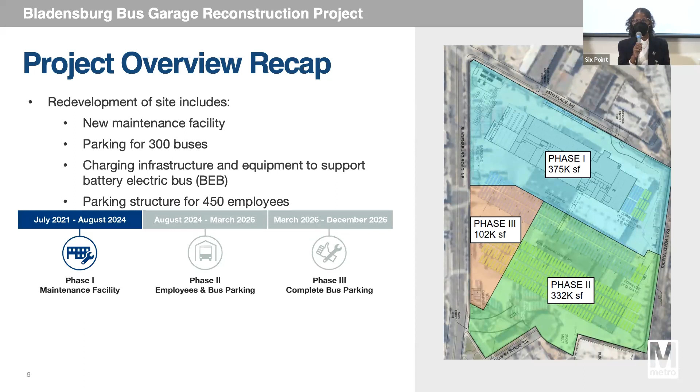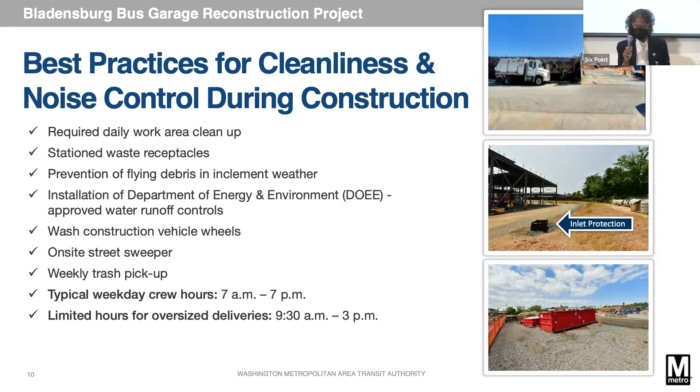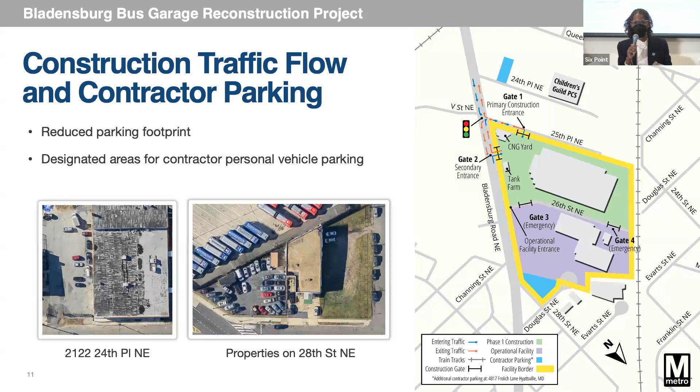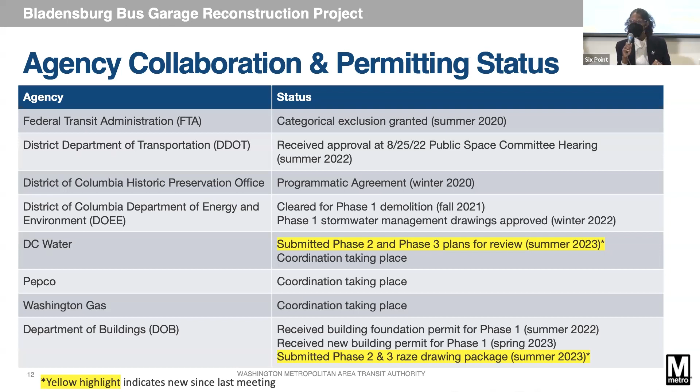I also want to point you to 2 upcoming events by Metro, one of them being Metro's Bus Maintenance Information Session, which is happening in November, and also Metro's Transit Police Prospect Day open house in December. You can visit the links to find out how to register and more details. So thank you.

Any questions in the room?

Is there any volunteer action to do anything for the community in those areas? When you say volunteer action, are you speaking to opportunities for the community to volunteer, or? The community volunteering to clean up or wash the inside of the buses. Right, so during the construction, the buses wouldn't be on site.

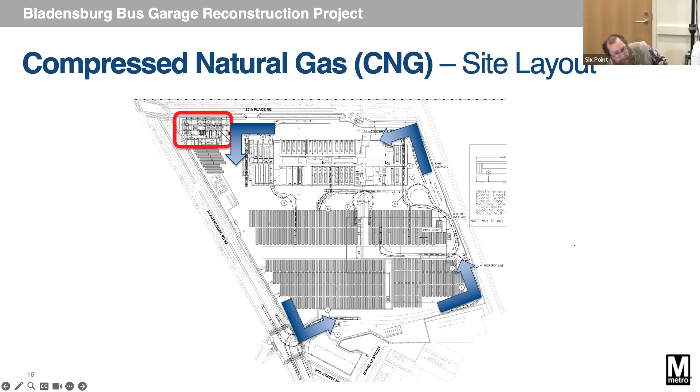Another consideration for where we located it was to reduce the length of underground piping. You can see on the right there's the fuel building, that's the fuel canopy, that's where the buses fuel with the CNG. And right over to the left is actually where the CNG yard is. So again, we wanted to reduce the length of the pipe underground. If you imagine putting this in the center of the site, you're just increasing the pipe length.

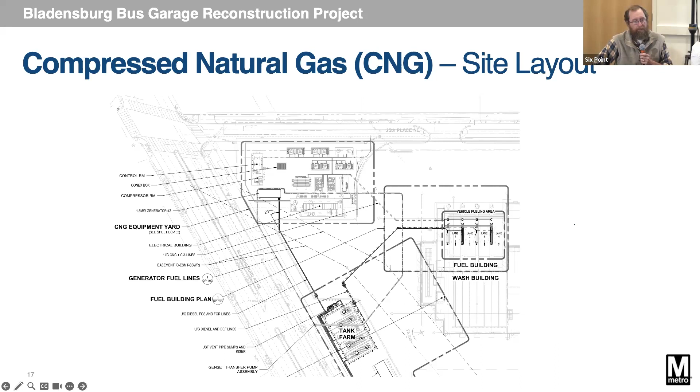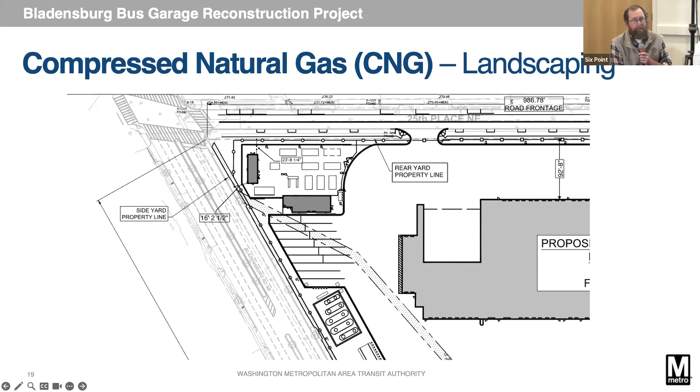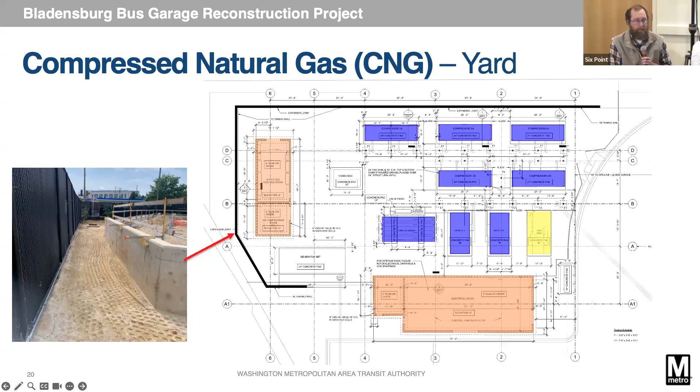So the top of that is what the finished grade will be. From that up to the top of the retaining wall in that corner, there is about 3.5 feet.

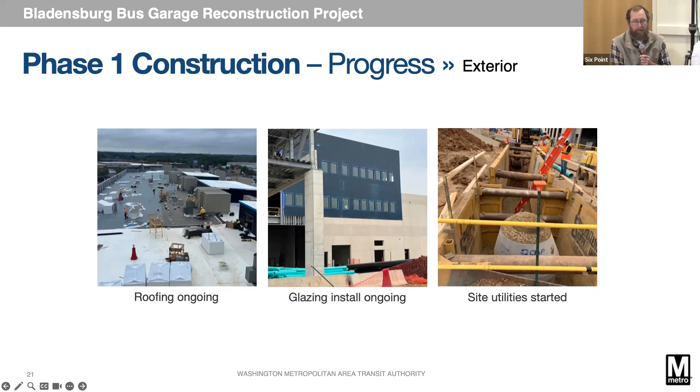Moving on, just some site updates and progress updates. Here's a lot of the exterior. So the roof, we actually finished the roof at this point, so you can kind of see that white, that's the finished roof layer. We installed a lot of the glazing, most of it at this point is installed and has been tested. And then we also started the site utilities.

This is a pretty cool shot. There's a pedestrian bridge that goes from the maintenance building over top of the roadway for the buses that ties into the parking garage. This is the first half of that bridge, the second half will be set in phase 2. You can kind of see it from both sides. Our building is really long, so some of these pictures, it's hard to actually show the perspective of how long it is.

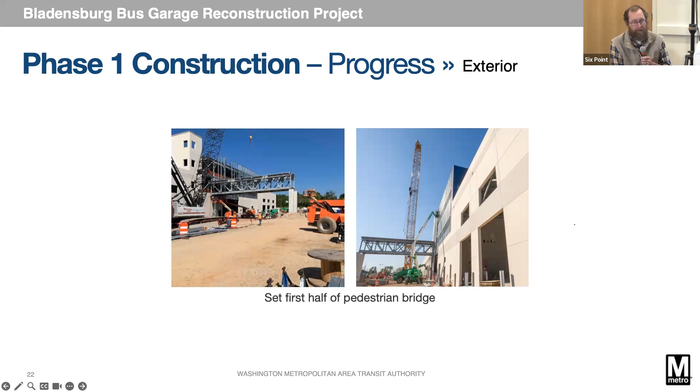Here's just another picture, trying to show work progressing and how long the building is, and where we're at in construction. All the precast is done, the windows are up, and we've actually started overhead doors.

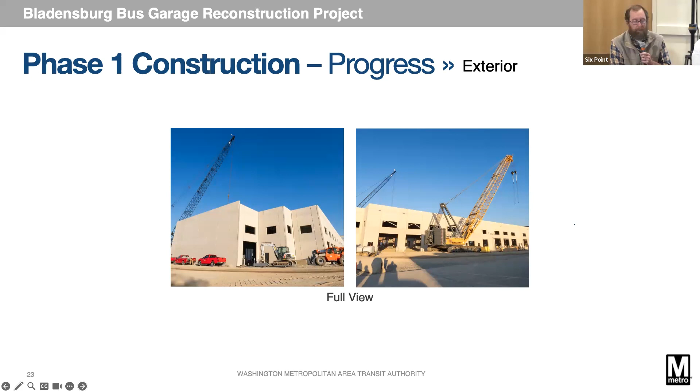How accurate and safe is it? So I believe the overhead doors are 14 feet wide, which is the same as the stalls, and it's the same as the doors that they have there now. So it should be fairly safe.

I can't speak for WMATA's operations, but I'm assuming they might have some protocol, but again, I can't speak for WMATA.

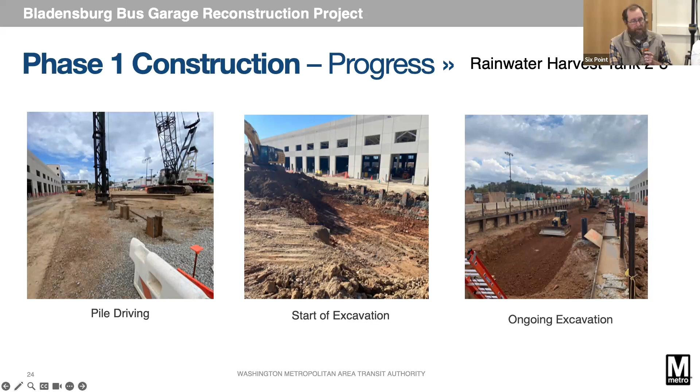We finished driving all the piles and we've started making our first initial cut and into our second cut. You kind of see the progression from left to right there.

We also started the CSX wall. We have a small retaining wall on the north side of the site. Right on the other side of that fence is the CSX lines. These piles you see were actually drilled due for safety for the tracks and everything. We had a lot of coordination with CSX, and we came to the resolution that drilling these piles and setting them in concrete was best for us and them. So you can see the progress, this wall is actually done. We just have to clean up the bench that you see those pieces of equipment on.

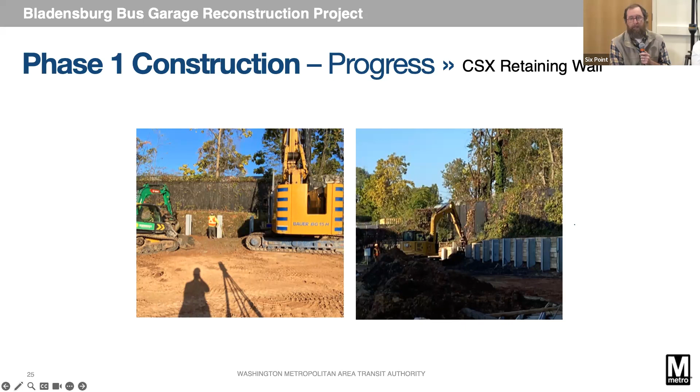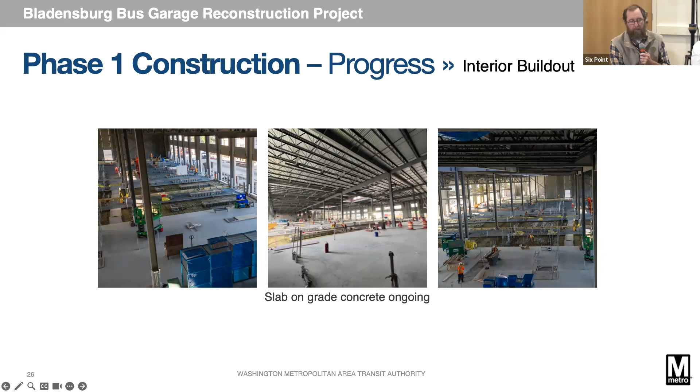Here's the interior, you can see the roof is on. We really wanted to highlight how much slab on grade work has been completed. As of last week, we have finished all of the interior slab on grade, that's basically the concrete down on the floor there. You can see a couple different angles and viewpoints.

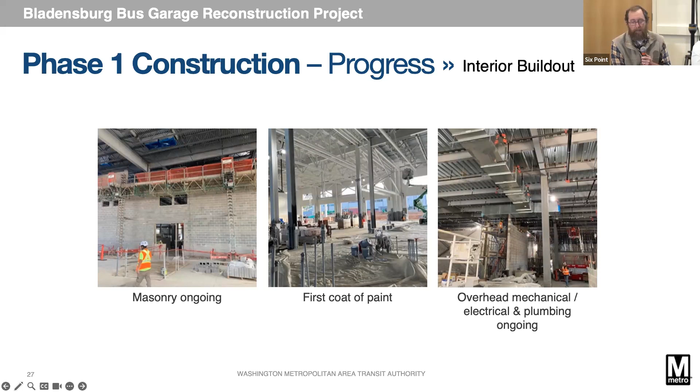Continuing on with the interior, the mason has finished up most of their tall walls. We've started painting the first coat of paint on the interior, and a lot of our overhead mechanical, electrical, plumbing, and fire protection has started to go in as well.

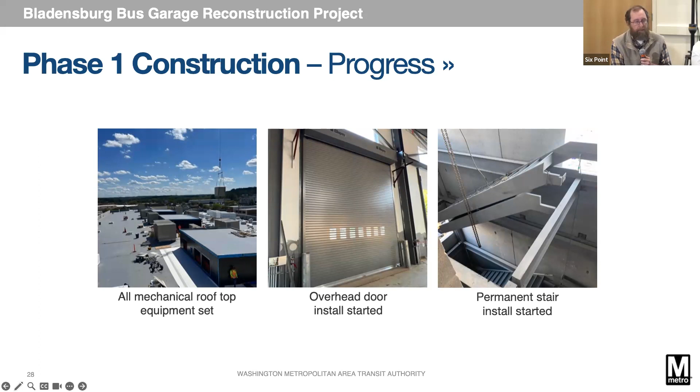Some last shots here. We did set all of the rooftop equipment. Our overhead doors have started, and we've actually started all of the interior permanent stairs. I think with that, I'll turn it over to Donzel for questions.

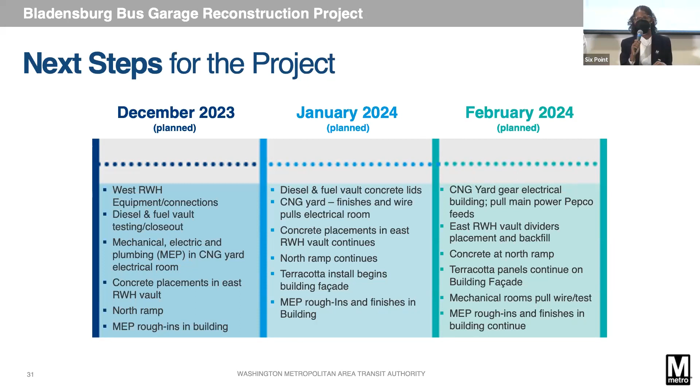Thank you, Donzel. So looking ahead to the next quarter - next slide, please. In December, we'll be working on items including the equipment and connections for the West Rainwater Harvesting Vault, also mechanical, electrical, and plumbing items for the CNG yard and building, diesel and fuel vault testing, as well as north ramp work.

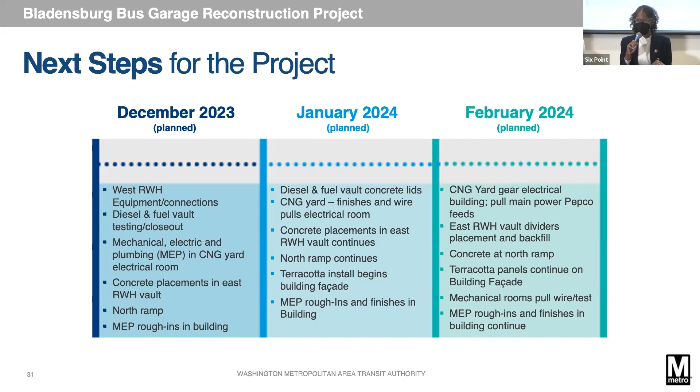In the new year, we will work on including installing terracotta on the building's facade, the East Rainwater Harvesting Vault, as well as continuing north ramp work. And in February, we will work on items including power feeds for the electrical building in the CNG yard, plus continued work on the terracotta panels and the north ramp. Next slide, please.

And as BEB design progresses, we will update the schedule for any impacts that it may have. And at this point, I will pass it to Maya.

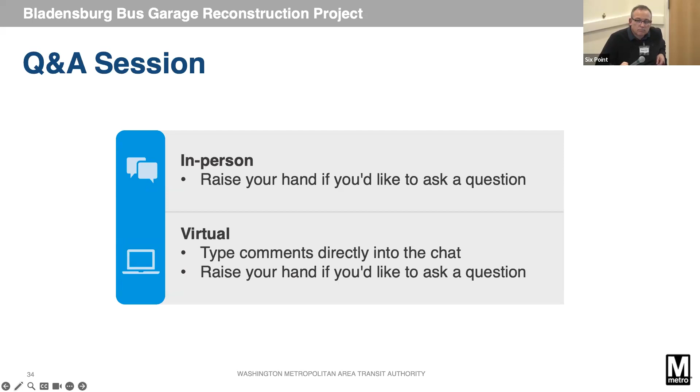We are probably, I think, a month and a half to 2 months. Okay, so by the end of the year, that'll be done and not a headache. Should be, yeah. Like I said, we're done driving piles. We don't have any more piles to drive. Okay, thank you. All right.